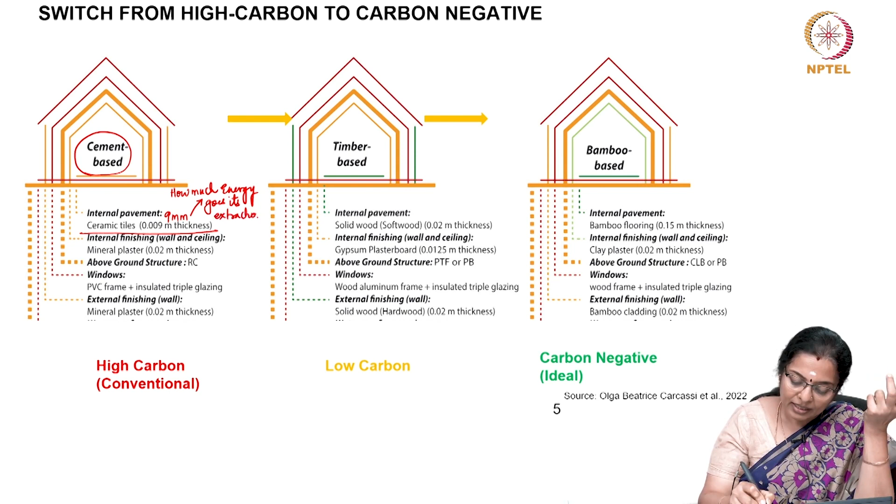Now you need to understand the embodied energy and embodied emission, the repercussions on this. You need to understand how much energy goes into its manufacture. So how much energy goes into its extraction of raw materials and manufacturing process, not to mention its transportation. In comparison to that,

suppose the client is advised to go for something like a softwood. So 20 millimeters softwood. What is the embodied energy repercussion of using 20 millimeters of solid wood? So how much energy would go into its extraction? What is extraction here? Extraction would be to get a natural product. Wood is a natural product, but wood also has some life. There is some more sequestration left in wood. So you need to understand what is its extraction.

And at this stage, extraction is say felling of a tree, maybe a mature tree. And then its manufacture, yes, it does involve some energy in its manufacturing, from a wood to becoming a pavement. And third is its transport. Yes, some amount of transportation would be involved, but not to the extent of a ceramic tile, which is a high carbon material, because it may be probably transported from the adjoining state, whereas the transportation of this solid wood would be within the state.

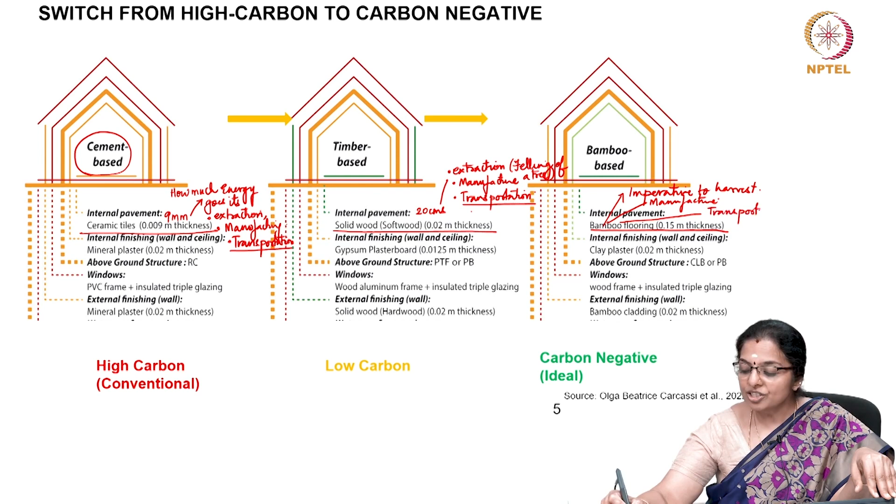And third is transport. Transportation energy, if it is from the adjoining state, it would be almost same as the timber based building. But if it is from the local place, because bamboo can also be a very local material, can you imagine, for just one decision of flooring, in a cement based building where ceramic tile is used, in a timber based building where solid wood is used, and in a bamboo based building where bamboo flooring is used, the amount of emissions can fall drastically.

Let us look at the second decision of this cement based building. Now, internal finishes are imperative, and therefore let us look at the decision on finishes in all of these three buildings. Suppose the internal finish of wall and ceiling is a mineral based plaster. So, mineral based plaster, suppose we go in for a cement plaster.

Now, cement is a very carbon intensive material. Its extraction has humongous repercussions on the environment, and its processing, using clinker and things like that, which we will see in the forthcoming classes also, is extremely high. So, cement is a very energy intensive material. Mixing this cement with sand makes it an even more energy intensive material.

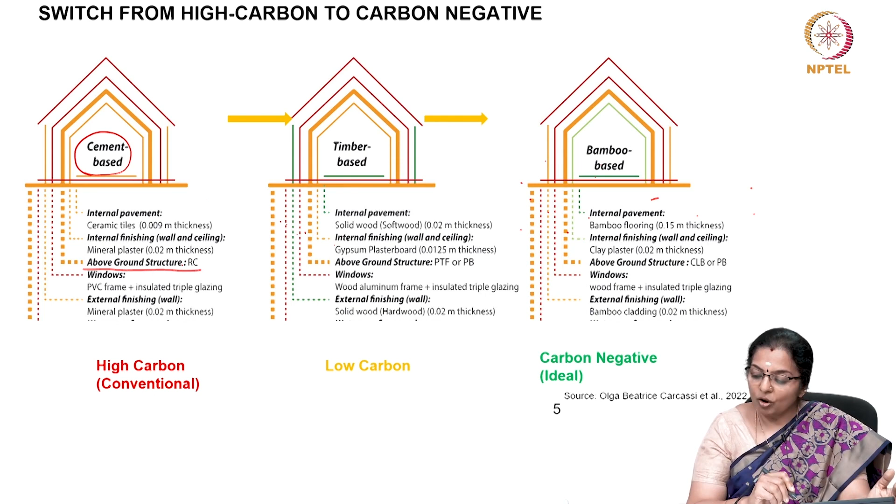Depending on whichever masonry structure you want, suppose in a cement based building, I am just giving options, you use reinforced cement concrete for the ceiling, and you use burnt brick. Whereas in a timber based building, you use something like CLT for the ceiling, and for the walls you could use any low carbon material. Say you can use CSEB. Think for a moment. And for bamboo, I am talking only of walls and ceiling.

You can have bamboo reinforced ceilings, quite used in Kerala also. And for walls, you can use bamboo itself, or you can have mud, stabilized mud walls. You can use either.

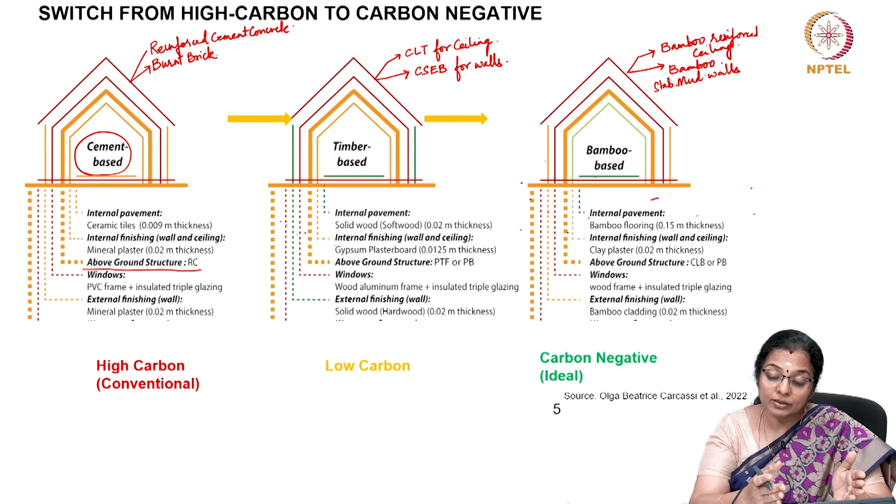So this itself shows how much embodied energy reduction can happen when you use alternate materials to high carbon building material. By high carbon I mean reinforced cement concrete for the roofing, burnt brick for the wall, and for low carbon you can go for compressed stabilized earth blocks for the walls,

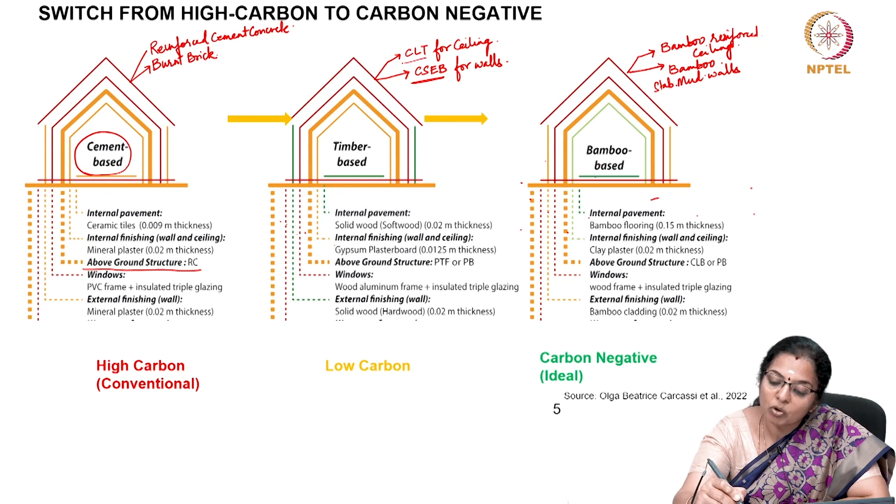then you can use laminated timber for ceilings, and for a bamboo building, if you use bamboo reinforced ceiling or bamboo walls or stabilized mud walls or unstabilized mud walls, then it will make so much difference to the carbon emissions and you will get a carbon negative building.

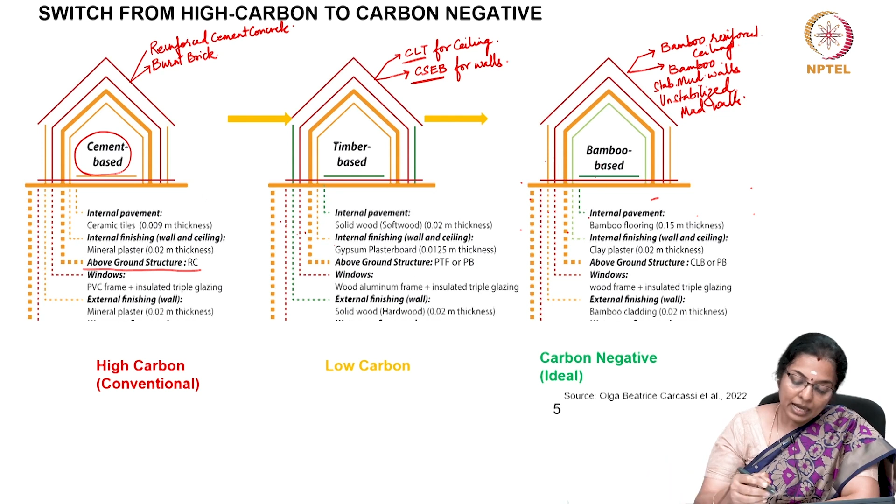Another important component which I wanted to talk about is windows and doors, which we tend to avoid addressing, but that is also a very energy consuming thing. Suppose you have a PVC frame and insulated triple glazing. PVC is a very synthetic material and a humongous amount of energy is required in its extraction and manufacture. Insulated triple glazing involves a lot of glass, and the manufacturing process is also very energy intensive. Whereas in a low carbon building, you could choose to have a wood aluminum frame, a combination of wood and aluminum, and insulated triple glazing.

Whereas in a bamboo based building, just wood frames would do, and there is no need even for glazing. You can avoid this glazing and have timber or bamboo windows, leading us to carbon negative.

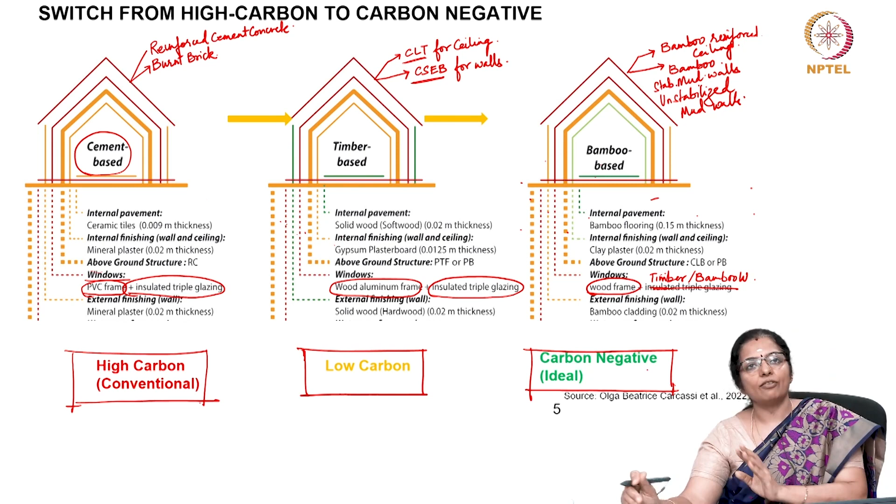So, just our choice of building materials is so important in making a building either high carbon, which is the conventional way of material selection and construction, or low carbon, which is finding some clientele in a very niche area, or carbon negative, which is the most ideal situation. And this is what the world needs today if we need to meet our emission goals.

So, we need to shift slowly. This shift is very important. Just to give you perspective, let us look at the embodied carbon of some of the insulation materials.

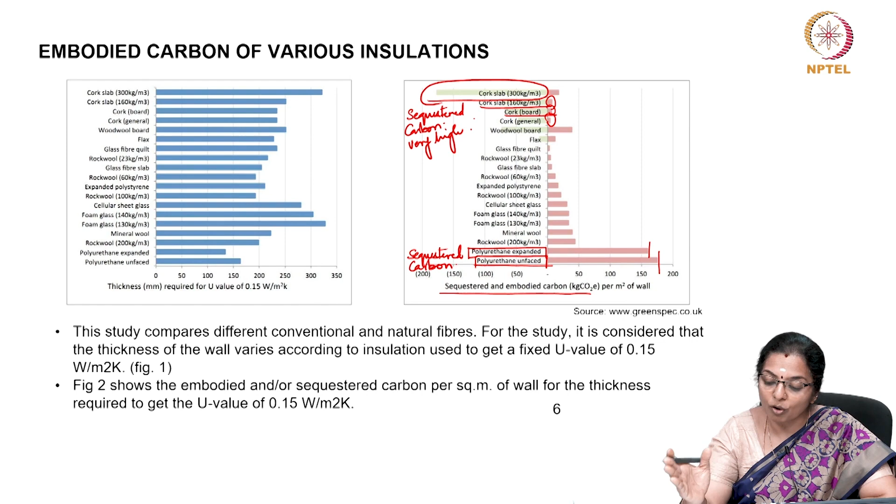or flax. So, these are natural products. Sorry. So, these are natural products, and therefore, even though they may have some amount of embodied carbon by virtue of their manufacturing process, they have a very high amount of sequestered carbon, which is also an important criteria for us to consider. So, these are natural fibers.

Okay. So, this was actually based on a study that was done, and that study considers the various building materials for particular density and thickness. Okay, to achieve the same U value of 0.15 watts per meter square Kelvin, how much of each of this material is required? That is what the study is based on.

And you can see, for achieving the same result, how much energy is required by materials which are extremely high carbon consuming, materials which are high carbon consuming, and materials which are low carbon. I would name these materials as medium carbon. And this is high carbon.

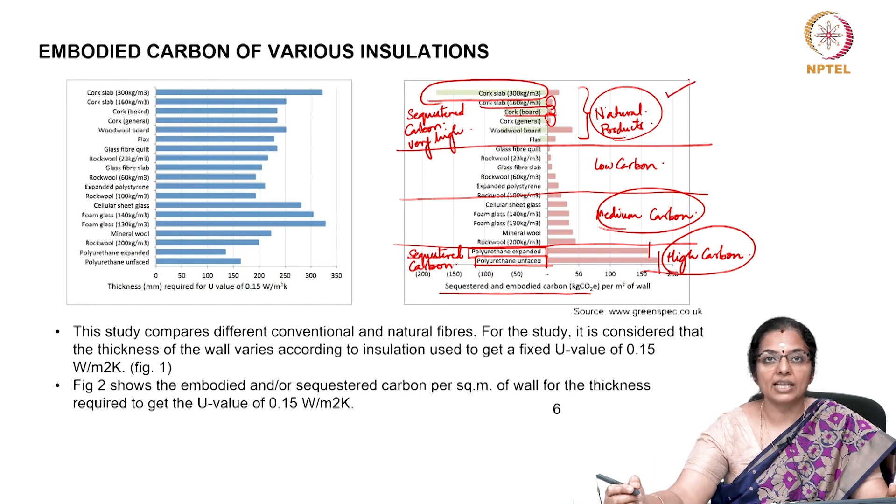So, sitting with the client and talking to him and going for natural products, the point being, even if you have to maintain after some time, still the embodied energy for maintenance is not going to be too high. But if you have to maintain high carbon or medium carbon, the embodied energy is going to be very high. And the bonus of having natural products is that you still have a lot of carbon to be sequestered. And therefore, I am going on reiterating that it is very important to have the appropriate building material choice.

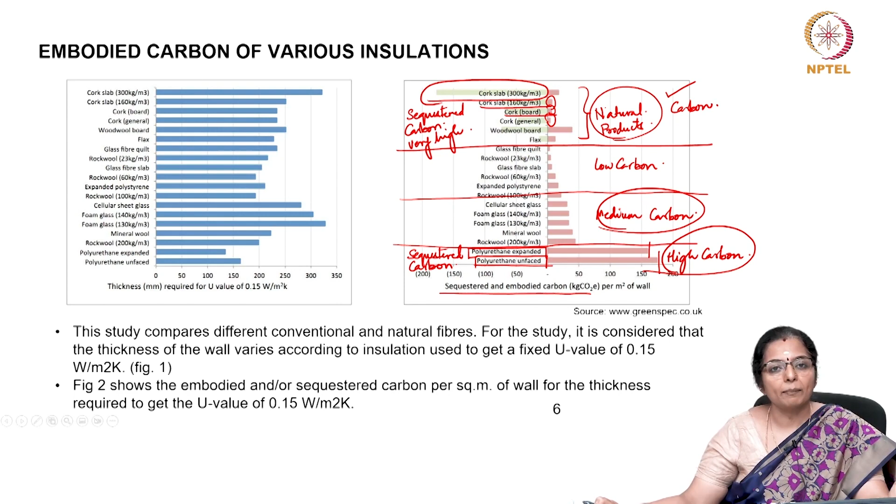Now, I would just like to give you a perspective about what happens when you start using recycled materials. Aluminum is the most recyclable and the most recycled material in use today. Aluminum has very high initial embodied energy, in fact, it's one of the highest. But if you are using recycled aluminum, that's the least you can do for the material choice you have made.

Now, you see, for reprocessing, the energy savings is very high when you start using aluminum as compared to steel, and for glass the embodied energy savings is very less. We will come to this graph a little later. But let us understand some basics, that aluminum recycling involves remelting the metal, which is cheaper and more energy efficient than its production from raw bauxite, which is done through electrolysis of aluminum oxide.

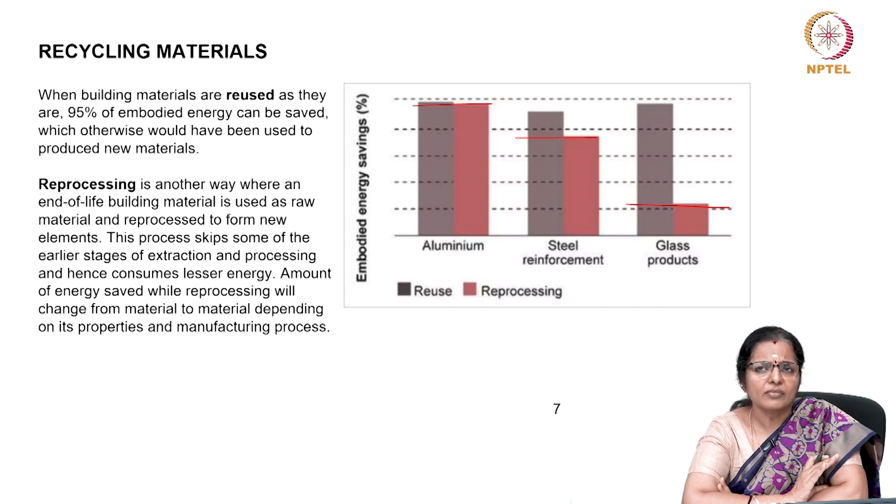However, we should note that compared to aluminum, the savings for recycling of steel is less. But its savings as compared to having to manufacture a completely new product is very high. That's up to 75%.

Now, glass is also 100% recyclable and you can endlessly recycle. Once you recycle the glass, you use it and then after some years, 30 years, 50 years, you could again recycle the glass and there will be no impact on its quality. The major source of embodied carbon in glass is the energy to heat the furnace to melt the raw materials. Now, this process anyway has to be carried out even while recycling.

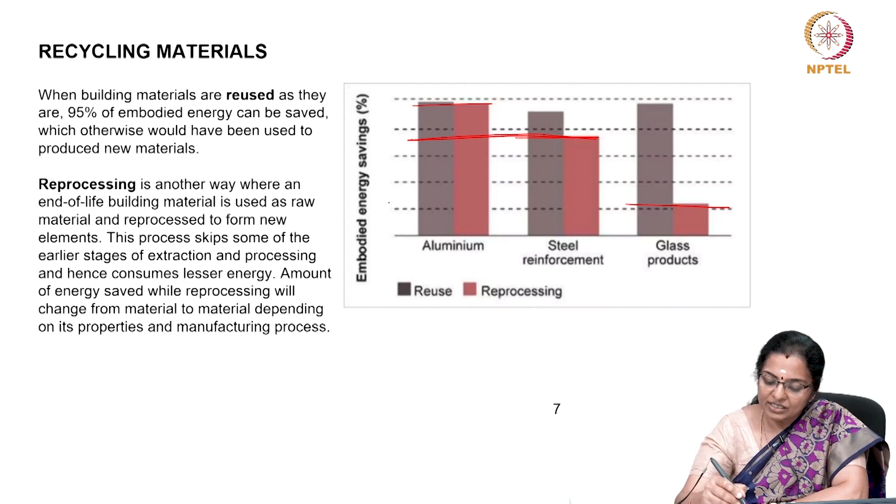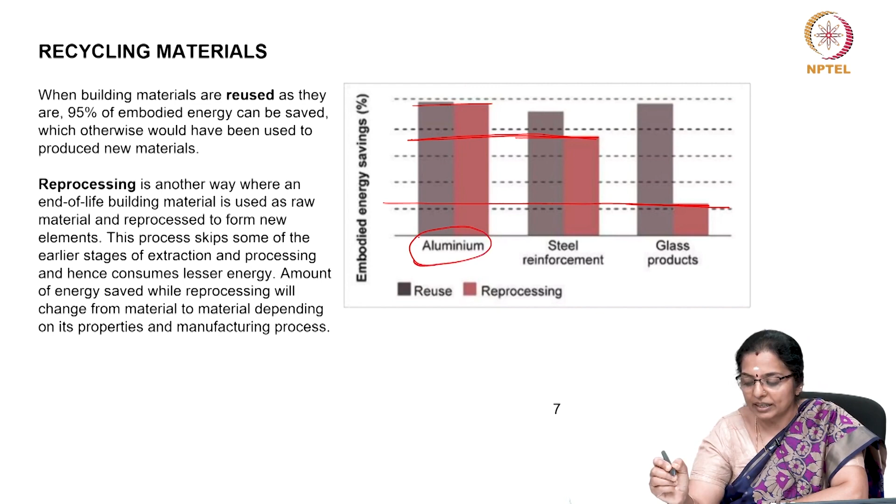Hence, recycling of glass does not save as much embodied energy as aluminum or steel, as you can see from this graph. Therefore, if you want to consider a recycled material, aluminum is a much better choice as compared to glass or as compared to steel.

We will quickly see materials with carbon sequestering properties, because I had been talking multiple times about carbon sequestration when we were discussing the use of cork products. So, carbon sequestration is the process of capturing and storing atmospheric carbon dioxide. It is like the inherent property of the material because it contains the biomass. So, the carbon is not yet released from the material, but it is held in the material itself, and therefore all natural products will have carbon sequestered in them.

These products absorb more carbon dioxide in their growing phase than they emit during production. Therefore, it is assumed that these products have a negative global warming potential value. Here I have shown some materials which have sequestered carbon, and what is their renewable feedstock energy.

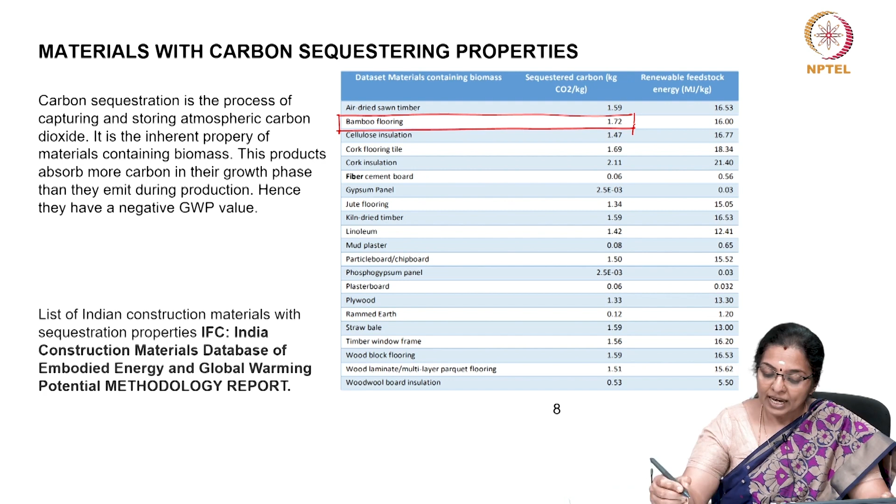So, you can see air dried sawn timber or bamboo flooring has very high sequestered carbon, which means it consumes more carbon in its growth phase and holds more carbon than the carbon that is needed to make it into any product, and you can notice it is a natural product. So, even amongst natural products, bamboo seems to have very high sequestered carbon, as much as timber. We can well imagine that timber also has more carbon in it. And again you can see cork, all cork products, they have large amounts of carbon sequestered in them.

Now if you look at any of the natural products, whether it is straw bale or timber or wood, any wood based product, you can see that the carbon sequestration is high in them. The carbon sequestration is in the range of 1.5 to say 1.75 kg carbon dioxide per kg of the product.

If you look at products which need some kind of manufacturing, say fiber cement board, you can see carbon sequestration is almost 0, it's 0.06. Whatever little carbon sequestration happens is because of the natural fiber that is used as an additive in the cement board. Otherwise it would definitely have no carbon sequestered in that.

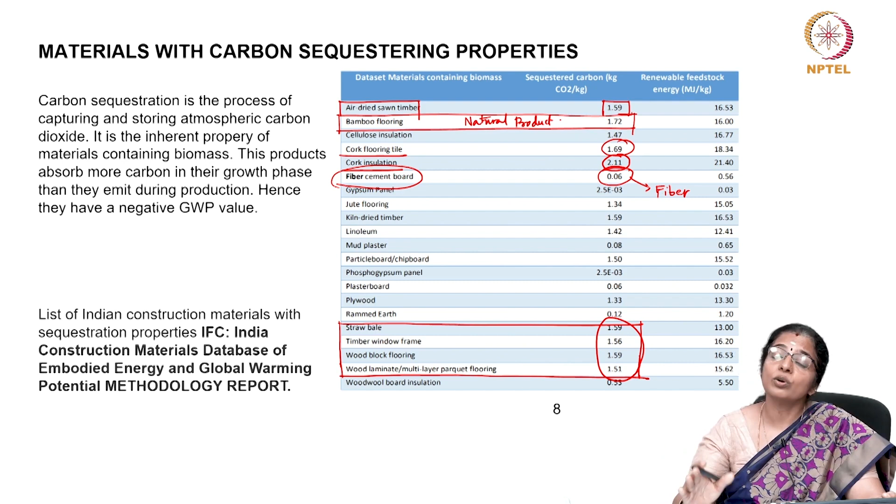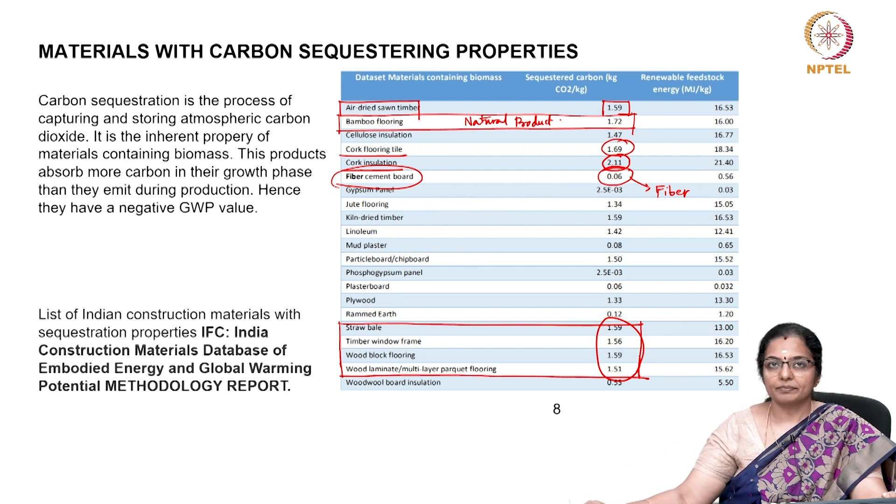And so this gives us a perspective about what materials have more carbon sequestered and therefore are kinder to the environment and therefore support decarbonization by having reduced embodied carbon emissions. They are all made up of natural fibers, or they all have some natural material in them.

And another thing we have to be careful about is which component consumes most of the embodied carbon. Based on that, we can decide on an alternative building material for that particular component in such a way that the embodied carbon will be reduced. So, we already know that embodied carbon emissions are associated with materials and construction process through the whole life cycle of the building, not only at the initial stage.

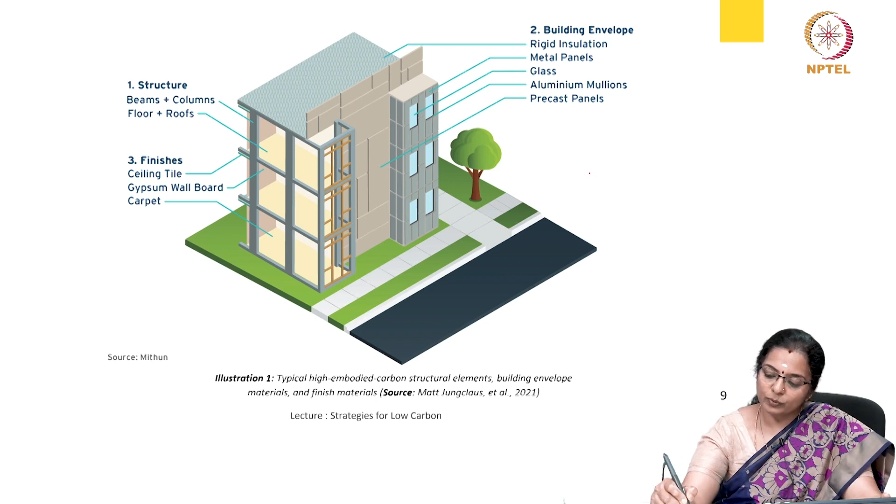Now, our choice of low carbon materials becomes important because there are certain components in the building which can consume a lot of embodied carbon. They can hold a lot of embodied carbon, and therefore we need to identify this. That is where the early design stage is important. Catch it young.

At an early design stage, make your decisions about what building materials you want to use, how you want to manufacture, or rather from which part do you want to bring those building materials. So those decisions become very important in ensuring that we have a low embodied carbon building. And that was our topic today. And this will be one of the important ways to reduce embodied carbon in buildings.

So, I will leave you with this. And of course, the gist of this, we have seen how our choices of building materials will result in either a high embodied, high carbon building, or a low carbon building, or a negative carbon building, an extremely green building. And these choices are definitely in the hands of the architects and designers, taking the client into confidence.

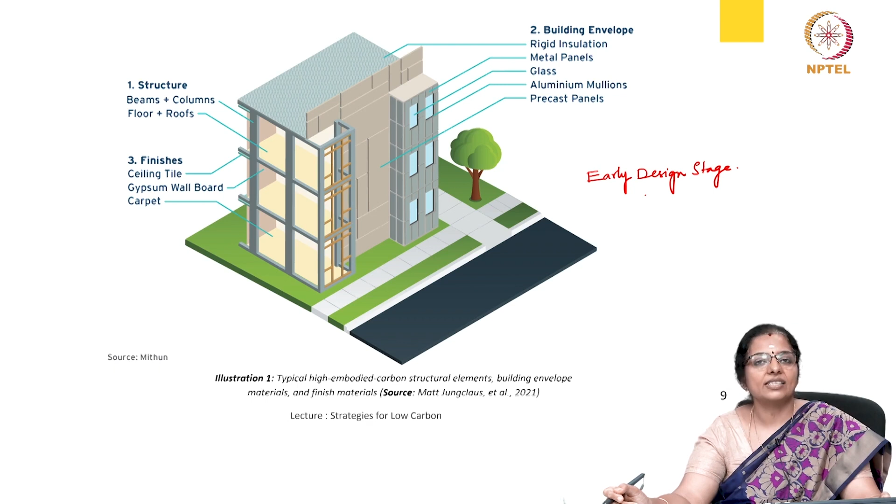So we will close this lecture now, to continue with further ways and strategies of how we can reduce embodied carbon.